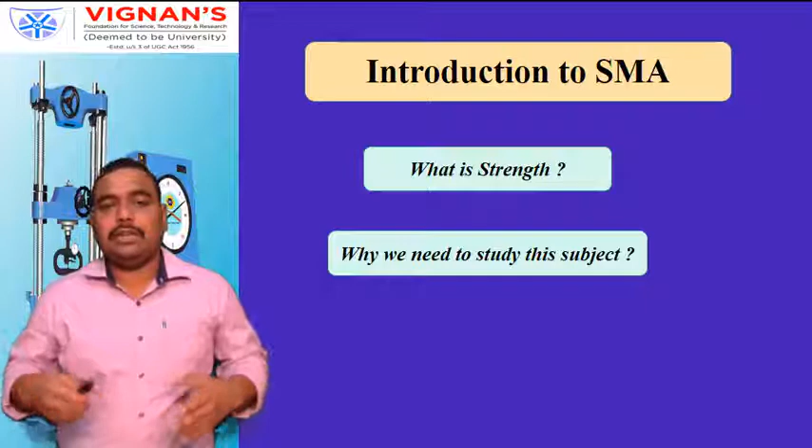Now, why do we need to study this subject? In engineering life, in application, daily we are using different materials. Before using the material, we must know the property of the material. Until we know the mechanical property of that material, we don't know what will be the behavior of the material. So before using that material, we must know its behavior and its property. That's why we should study this strength of materials subject. In this subject, we are also calculating the stresses developed on different components due to different types of loads, and we are analyzing it. This will be useful in the company for analyzing purposes, or also very useful for your project purpose or research work.

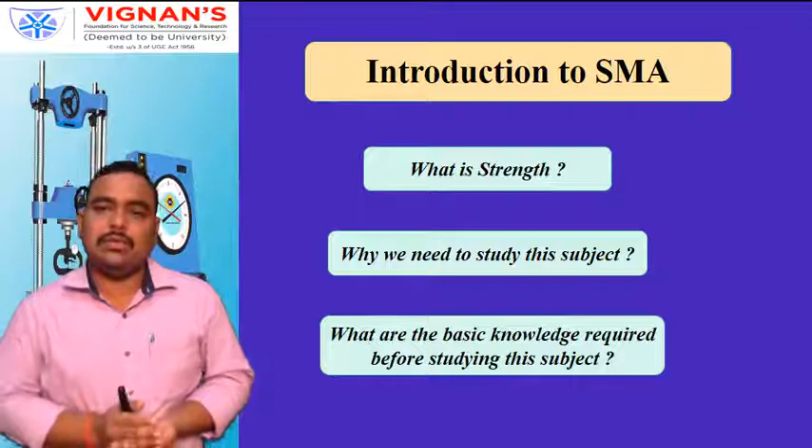Next is, what are the basic knowledge required before studying this subject? Here I am discussing about the stresses and analyzing, so definitely before that we have to study mechanics. In mechanics, we have already studied forces - parallel forces, non-parallel forces, concurrent forces, their resultant, and so on, frictions, centroid, center of gravity. So all this basic knowledge is needed before studying this subject.

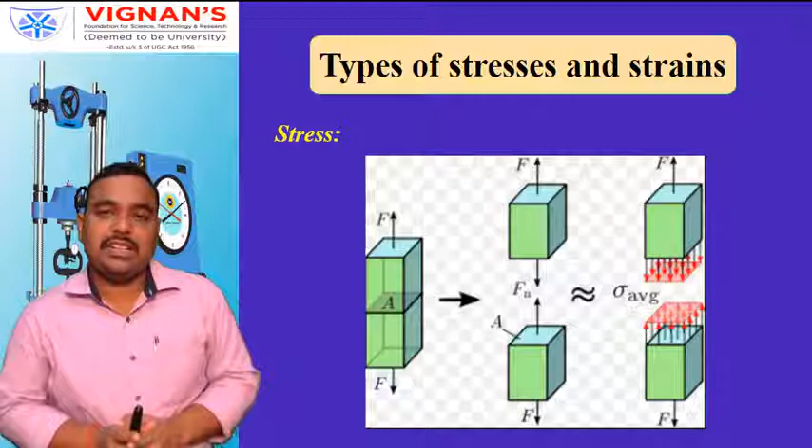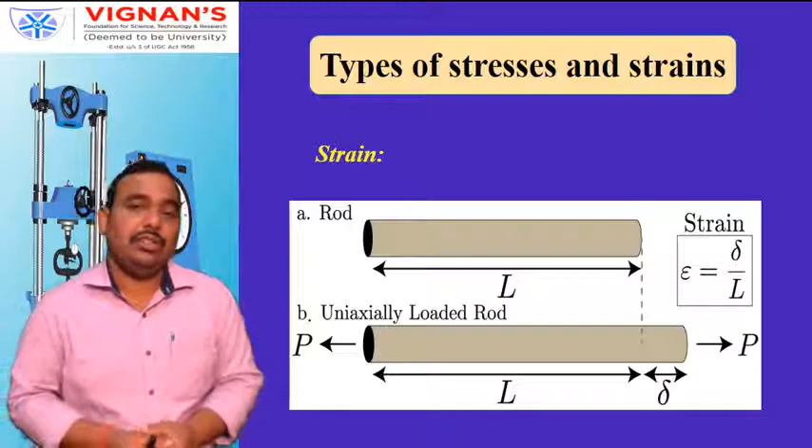Next is strain. What is strain? Strain is actually change in dimension by the original dimension - that's called strain. As shown here, one rod is there whose original length is L, and after applying the force P, it got elongated by delta. Now the new length is L plus delta. So strain is the change in dimension by the original dimension. Here the change in dimension is in the direction of length, so it is change in length by original length - the change in length is delta and original length is L. So delta by L gives the strain, denoted by epsilon. There is no unit of strain.

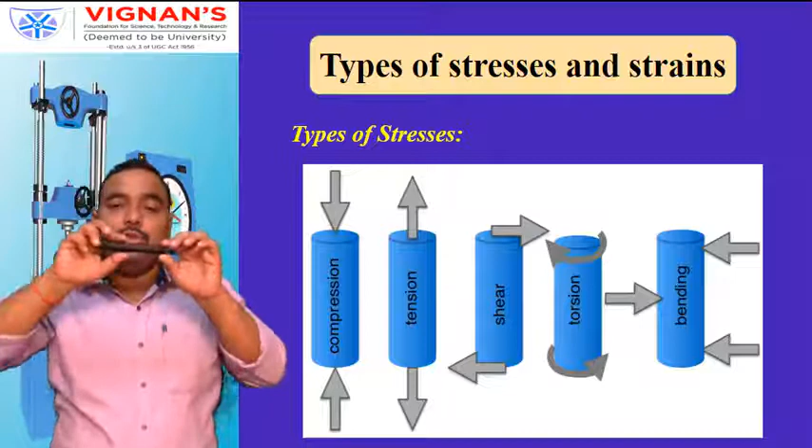And the last, fifth diagram, it is trying to bend. A rod is there. We are applying two vertical forces, and in the middle, opposite direction forces. Due to this force, the stress developed inside the element, inside the object, is called bending stress.

Next is types of strains. Here it is shown: one is normal strain, second is shear strain, and third is volumetric strain.

Normal strain is due to the load applied normally. If the load is applied normal to the surface, normal to the area, then the strain developed due to that load is called normal strain.

Shear strain is the strain developed due to the shearing force. Volumetric strain is nothing but the change in volume divided by the original volume, due to volumetric stress. So this is called volumetric strain.

Now normal strain is again divided into lateral strain and longitudinal strain. By the name itself you can identify: longitudinal means in the direction of the load applied. Longitudinal strain is the strain developed in the direction of load applied, and lateral means the perpendicular direction to the load applied.

If the load is applied in this direction, then the change in dimension perpendicular to this force is the lateral strain. Perpendicular means all directions, 360 degrees. So the change in dimension in this direction divided by its original dimension will give the lateral strain.

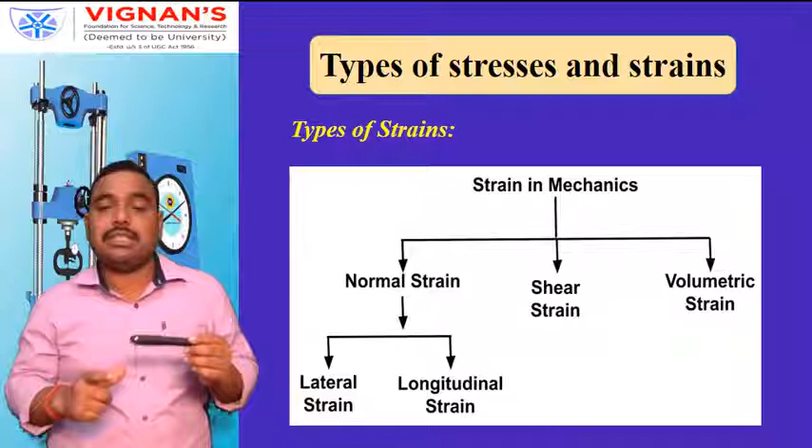So the longitudinal strain we can write as delta L divided by L, because delta L is the change in length in the direction of force applied. And the lateral strain we can write as delta D divided by capital D, because delta D is the change in dimension in the perpendicular direction of the force applied. So this is about normal strain, which is divided into longitudinal strain and lateral strain.

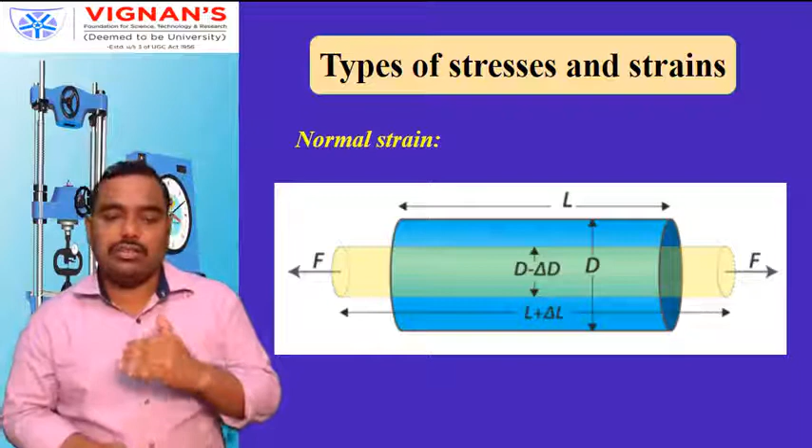Next is Hooke's law.

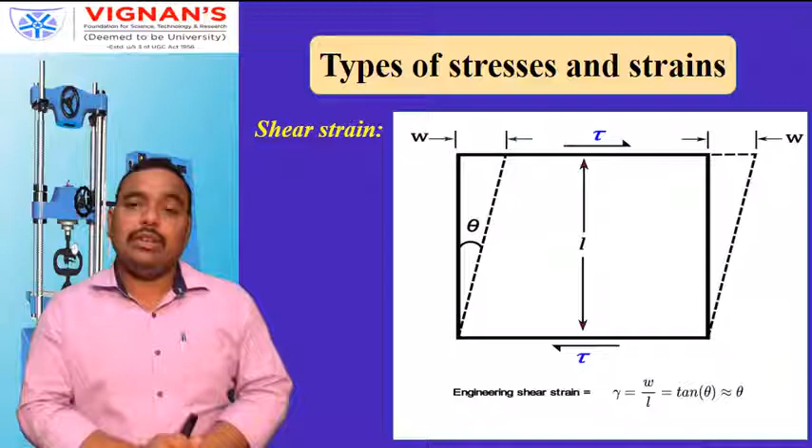Hooke's law states that stress is directly proportional to strain within the elastic limit. So we can write sigma directly proportional to epsilon, or E.

A small e here denotes the strain, sigma denotes the stress. So sigma is directly proportional to small e or epsilon. After removing the proportionality sign, we have to put one constant, so here it is kept, capital E.

Sigma is equal to capital E into small e, where capital E is called the modulus of elasticity, or Young's modulus of elasticity.

From this formula we can calculate capital E equal to sigma by small e, that is stress by strain. So we can define Young's modulus of elasticity as the ratio of stress to the strain.

It can be calculated that stress is P by A, and strain is delta L by L, which is change in length by original length.

So from here, capital E we can calculate as P into L by delta L into A. So this is the Young's modulus of elasticity, E.

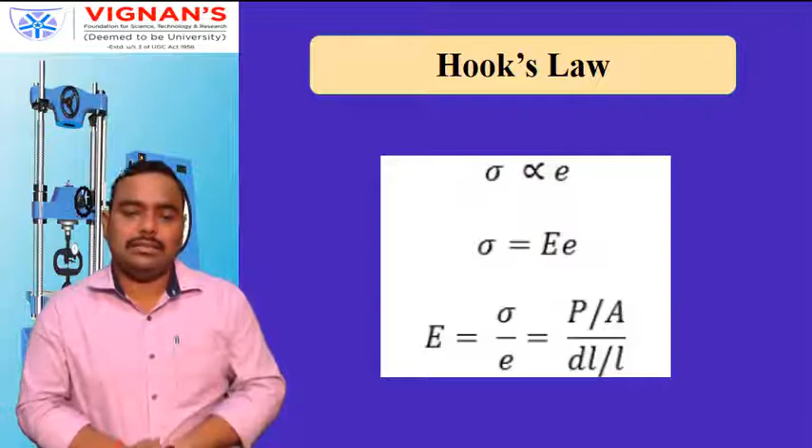Now we will solve one numerical based on this Hooke's law. A steel rod 1 meter long and 20 mm by 20 mm in cross section is shown.

It is subjected to a tensile force of 40 kilonewton. Determine the...

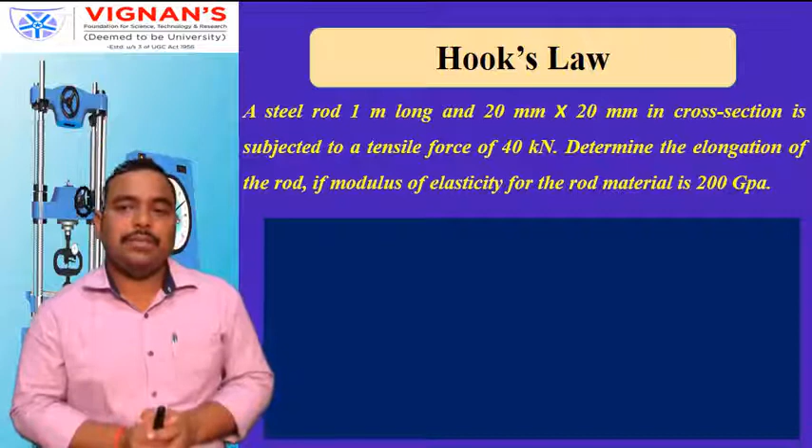...elongation of the rod. Elongation of the rod means delta L, change in length, if the modulus of elasticity for the rod material is 200 gigapascal.

So first of all we will write the given data. The given length is 1 meter, which we can write as 1 into 10 to the power 3 mm.

Next, the cross sectional area is given as 20 into 20, that is 400 mm square, and the tensile force P acting is 40 kilonewton, which we convert into Newton, that is 40 into 10 to the power 3 Newton.

Next is the modulus of elasticity, capital E, given as 200 gigapascal, and 1 gigapascal means 10 to the power 9 Pascal.

1 gigapascal means 10 to the power 9 Pascal, and 1 Pascal means 1 Newton per meter square. So we convert that meter into mm, and we get 10 to the power minus 6 Newton per mm square.

It means 1 Pascal equals 10 to the power minus 6 Newton per mm square. So if you convert 200 gigapascal to Newton per mm square, we get 200 into 10 to the power 3 Newton per mm square. So this is the given data.

Now it is asking for elongation, which means change in length. I told you capital E equals P into L by delta L into A. From that formula we can get delta L equal to P into L by A into E.

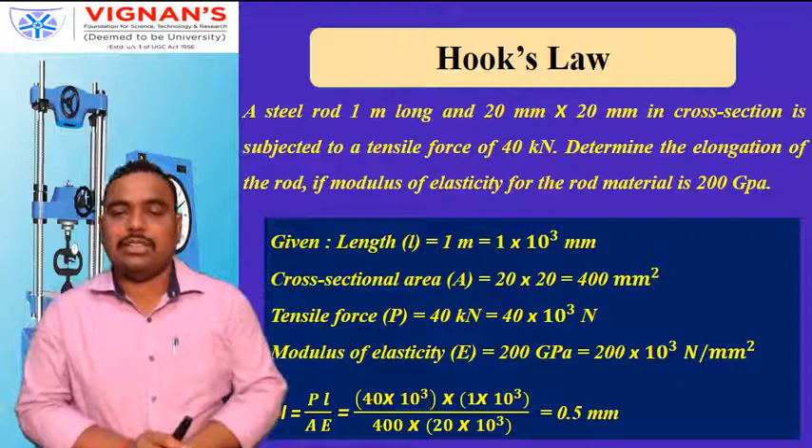Next we will solve one more numerical. A hollow cylinder 2 meter long has an outside diameter of 50 mm.

The hollow cylinder's length is 2 meter, that is 2000 mm. It has an outside diameter of 50 mm and inside diameter of 30 mm. If the cylinder is carrying a load of 25 kilonewton, that means 25 into 10 to the power 3 Newton, find the stress in the cylinder.

Stress sigma. Also find the deformation of the cylinder, means change in length, if the value of modulus of elasticity for the cylinder material is 100 gigapascal. So first of all we write the given data.

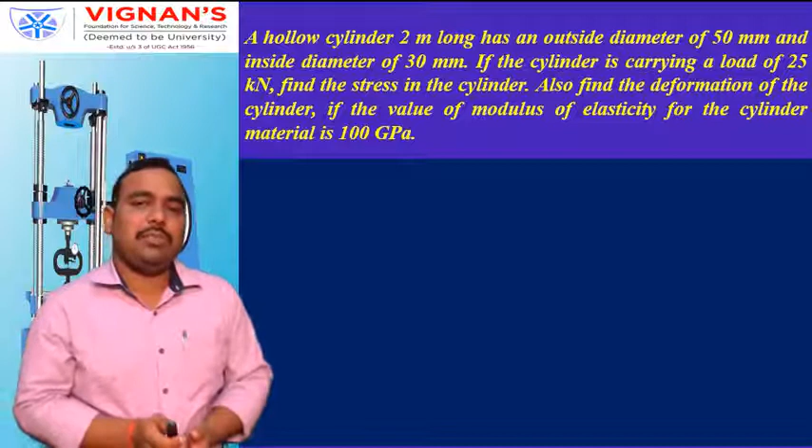The given length is 2 meter, that is 2 into 10 to the power 3 mm. Outside diameter, capital D, is equal to 50 mm. Inside diameter of the cylinder is 30 mm.

The load applied P is 25 kilonewton, means 25 into 10 to the power 3 Newton, and modulus of elasticity capital E is given as 100 gigapascal, means 100 into 10 to the power 3 Newton per mm square.

So first of all we calculate the area, and area can be calculated by pi by 4 into capital D square minus small d square.

Capital D value is 50 mm, small d value is 30 mm. Substitute this value and we got 1257 mm square. That is the cross sectional area of the cylinder.

Stress formula: force applied divided by the cross sectional area. Force is given as 25 into 10 to the power 3 Newton. Area we have calculated is 1257. Substitute this value and we'll get the sigma value. Stress value is 19.9 Newton per mm square, that is 19.9 megapascal. It is also asking the change in dimension or deformation in the cylinder.

Deformation formula: delta L equal to PL by A into E. We substitute all this value. P value is 25 into 10 to the power 3 Newton. L value is 2 into 10 to the power 3 mm. Area is 1257 mm square, and E value is 100 into 10 to the power 3 megapascal or Newton per mm square. After solving these values, we got 0.4 mm. That is the answer. This numerical completed.

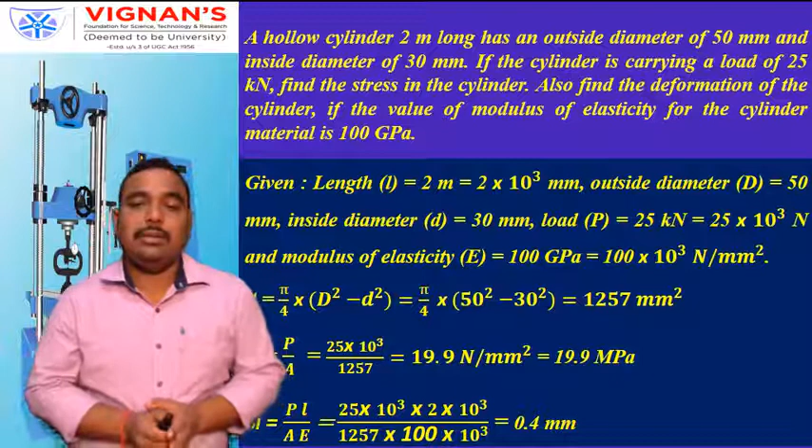Next, one more numerical is there.

A square bar of 20 mm side is held between two rigid plates. In the diagram, one square bar is there with two ends A and C rigidly fixed, and loaded by an axial force P equal to 450 kilonewton. An axial force P as shown there is acting in the downward direction, that is 450 kilonewton. Find the reactions at the ends A and C.

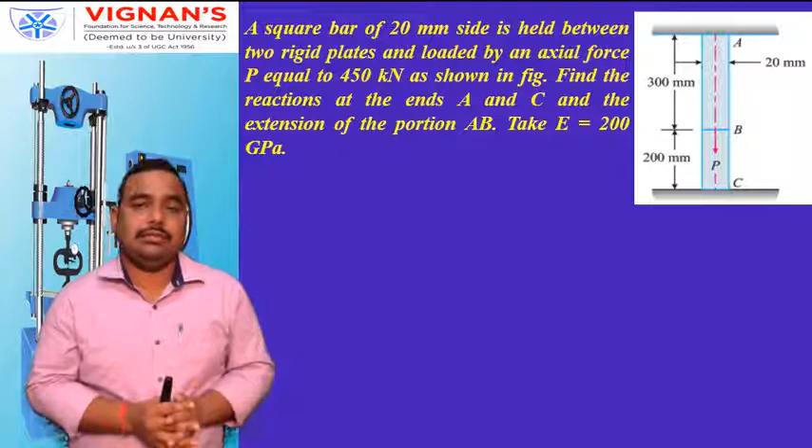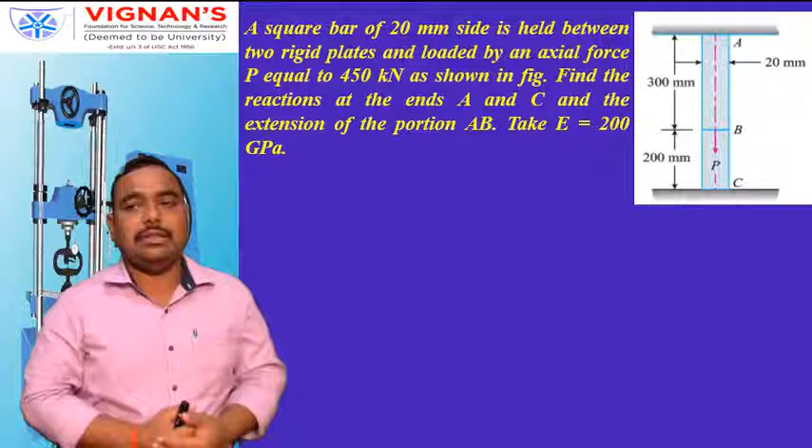It is asking to find the reactions. Due to this load, reactions will be there at point A and point C. What is the reaction at point A and C? It is also asking the extension of the portion AB. See, in the diagram, due to that load P, AB will increase whereas BC will decrease. So it is asking whatever change in length in AB, that will be equal to BC. So it is asking the extension in the portion AB, and given E equal to 200 gigapascal.

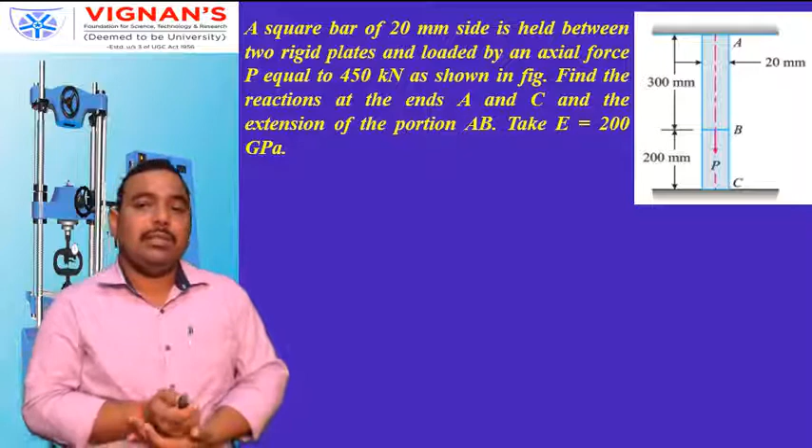First of all we will write the given data. Before that we will analyze these forces, as given in this diagram. At point B, load is acting in the downward direction, that is 450 kilonewton. Point B is the part of portion AB as well as the portion BC.

So let us say, due to the load acting at point B, the load in the portion AB is RA, or reaction force at point A is RA. Due to the reaction force RA shown here in the upward direction, downward direction also it will be RA, from Newton's third law. Similarly, we are taking RC, the reaction force at point C, in the upward direction, and at point B, RC is in the downward direction.

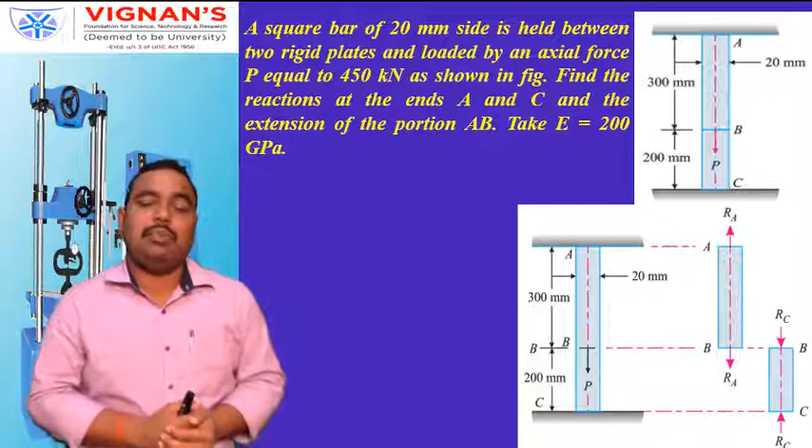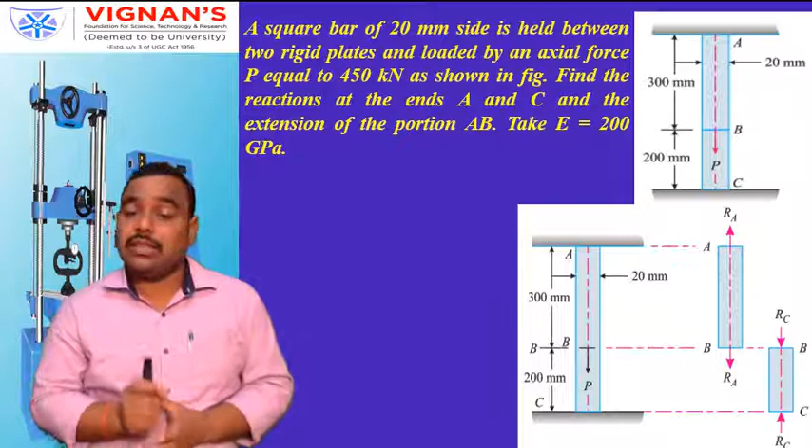If you see this second diagram, at point B, RA and RC are not acting in opposite direction, both are acting in the same direction at point B, and the total load acting at point B is 450 kilonewton. So therefore we can say RA plus RC, at point B only we are talking, must be equal to the external load applied, that is 450 kilonewton. So RA plus RC is equal to 450 kilonewton.

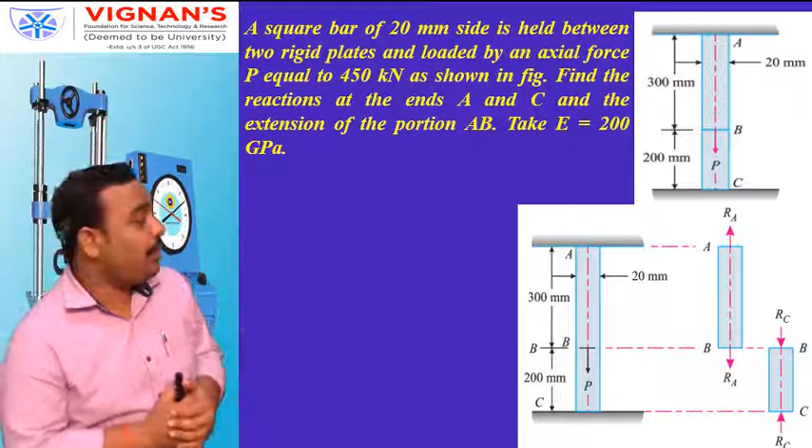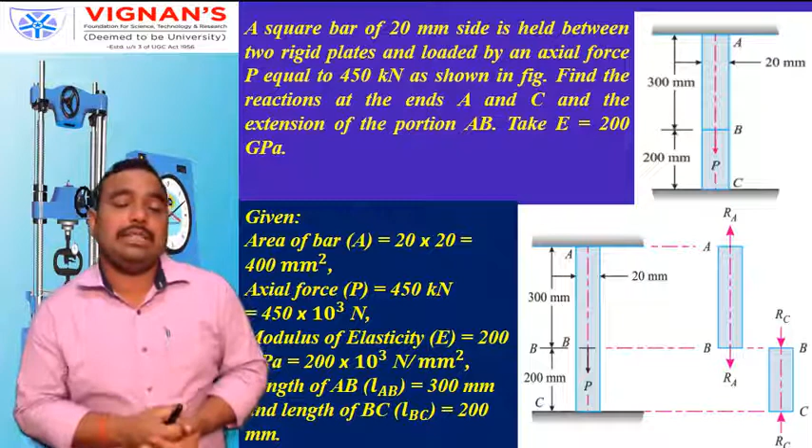Now we'll write the given data. Area of the bar is given as 20 into 20, that is 400 mm square. Axial force P is acting 450 kilonewton, that is 450 into 10 power 3 Newton. Modulus of elasticity capital E equal to 200 gigapascal, that is 200 into 10 power 3 Newton per mm square. Length of the portion AB is given, LAB, that is 300 mm, and the length of portion BC is given, that is 200 mm, denoted as LBC.

So now, first of all, RA is the reaction at point A and RC is the reaction at point C. At point B, RA and RC both are acting in the same direction, and total load acting at point B is 450 kilonewton. So RA plus RC should be equal to 450. This is equation number 1.

Now increase in the portion AB, we can calculate as delta LAB equal to RA into length of AB divided by area into E. RA we don't know, we need to calculate RA value. LAB is given 300, area is given 20 into 20, that is 400 mm square. E value is given, for time being we are writing just as AE. This is equation number 2.

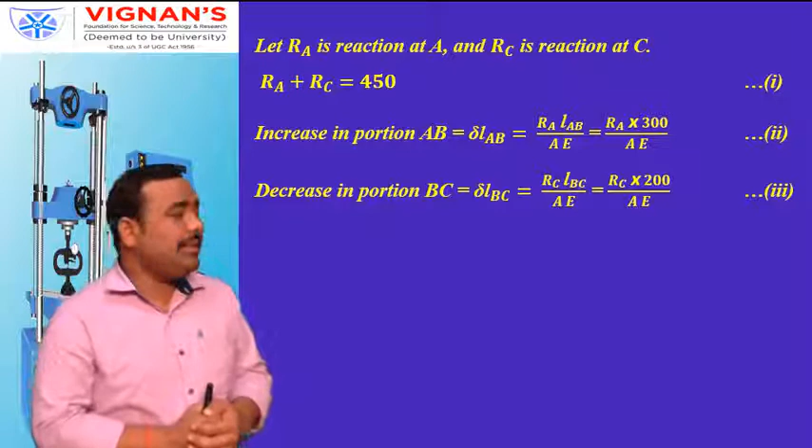Also decrease in the portion BC, equal to delta LBC, that is RC into LBC, length of BC divided by area into E. Length of BC is given 200 mm. We substitute this value and this is equation number 3.

Now point B is the part of portion AB as well as the part of portion BC. So the question is asking by how much point B is moving, or how much deformation is there for AB. Whatever change in length is there for AB, same change in length is there for BC. The difference is that AB is elongating and BC is decreasing. So how much AB will elongate, by the same dimension BC will contract or decrease.

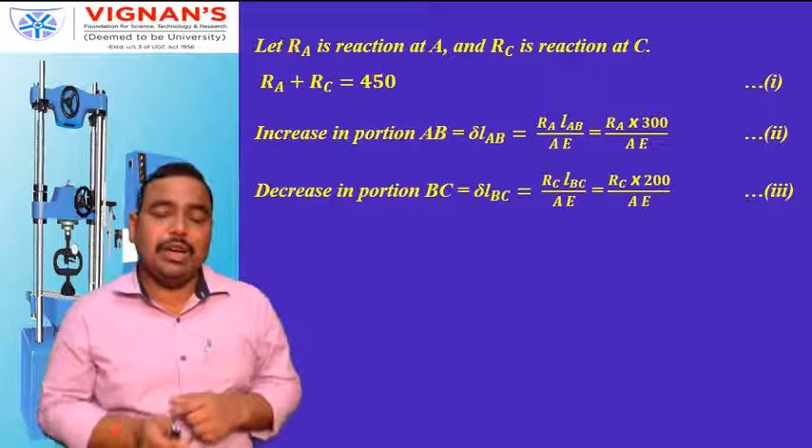From equation 2nd and equation 3rd, we can write delta LAB equal to delta LBC. Substituting this value, we got RC equal to 1.5 of RA.

Now from equation 1st, we know that RA plus RC equal to 450. Substitute RC equal to 1.5 RA, and we get RA plus 1.5 RA equal to 450. From there we get RA equal to 180 kilonewton and RC equal to 270 kilonewton. That is the reactions at support A and C.

Now the deformation in AB, or deflection in AB, we can say delta LAB equal to RA into 300 by A into E, as written in equation number 2. Substitute RA 180 into 10 to the power 3 Newton into 300, divided by area 20 into 20, that is 400 mm square. E value is given 200 into 10 to the power 3, giving delta LAB equal to 0.675 mm. That is the complete solution of this numerical.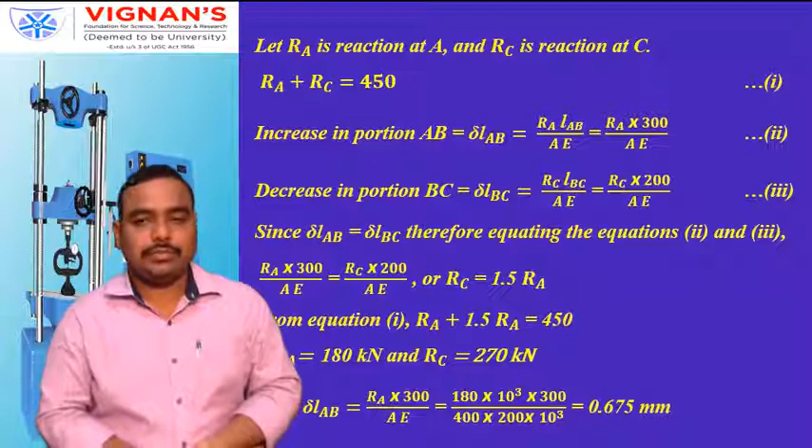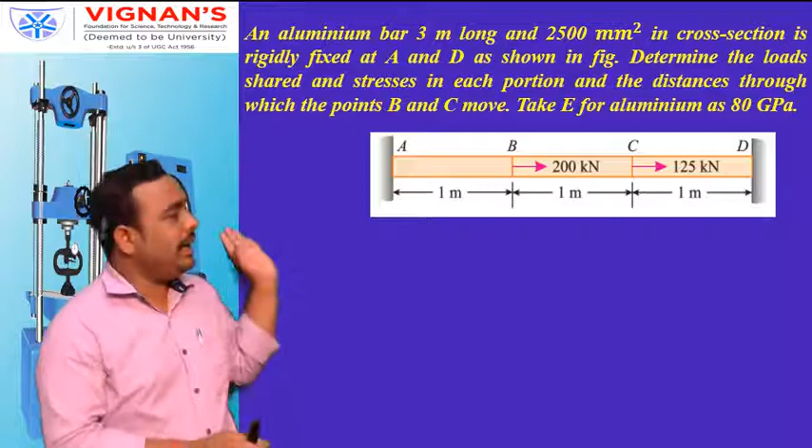One more numerical is there. An aluminium bar 3 meter long and 2500 mm square in cross section is rigidly fixed at point A and D as shown in the figure. Determine the loads shared and stresses in each portion, and the distances through which points B and C move. Take E for aluminium as 80 gigapascal.

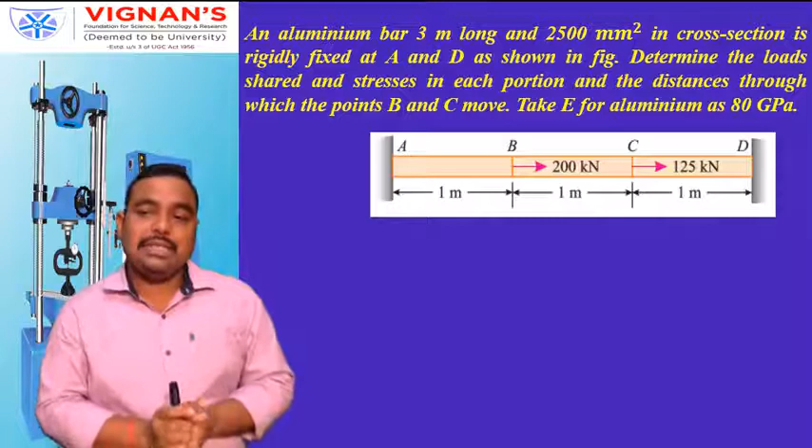So this is the diagram shown. Point A and point D are fixed. At point B, a load is acting of 200 kilonewton. At point C, load is acting of 125 kilonewton. AB is equal to BC is equal to CD equal to 1 meter.

Here, first of all, we will write the given data: total length of bar L equal to 3 meter, area of cross section A equal to 2500 mm square, modulus of elasticity E equal to 80 gigapascal, that is 80 into 10 to the power 3 Newton per mm square, and length of portion AB equal to LBC equal to LCD equal to 1 meter, that is 1 into 10 to the power 3 mm.

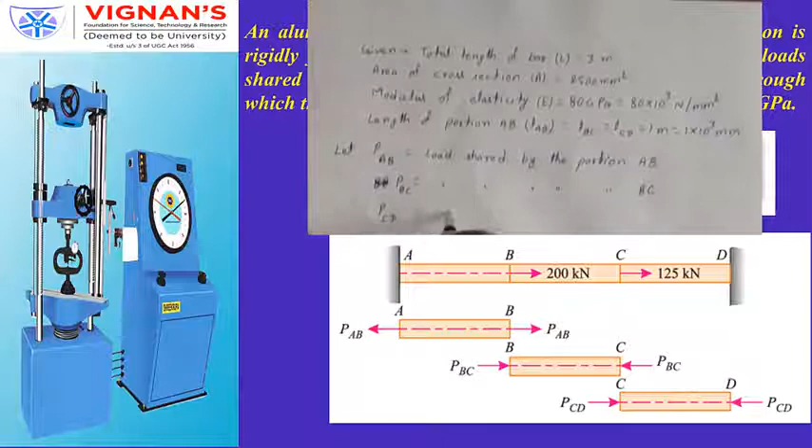Now let us consider PAB is the load shared by the portion AB, PBC is the load shared by the portion BC, and similarly PCD is the load shared by the portion CD.

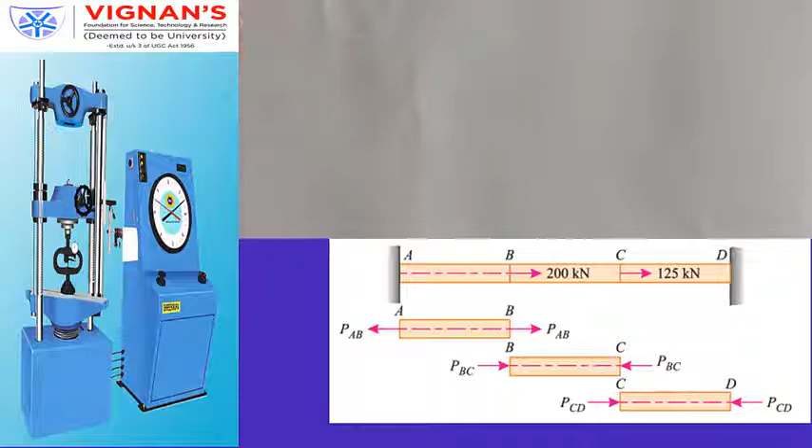Since the bar is rigidly fixed at point A and D, therefore the portion AB will be subjected to tension, while the portion BC and CD will be subjected to compression as shown in the second figure. Moreover, increase in the portion AB will be equal to the sum of the decrease in portion BC and CD.

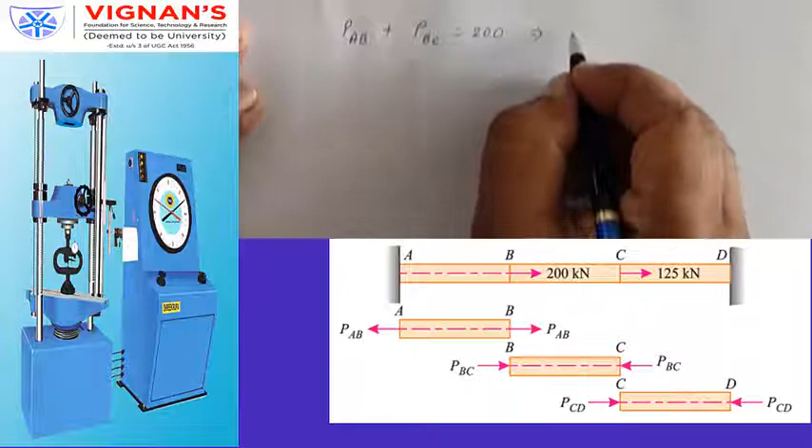Now from the geometry of the bar, we find that PAB plus PBC is equal to 200. From here we can write PAB equal to 200 minus PBC. This is equation number 1.

And again we can write PCD minus PBC equal to 125. From here we can write PCD is equal to 125 plus PBC. This is equation number 2.

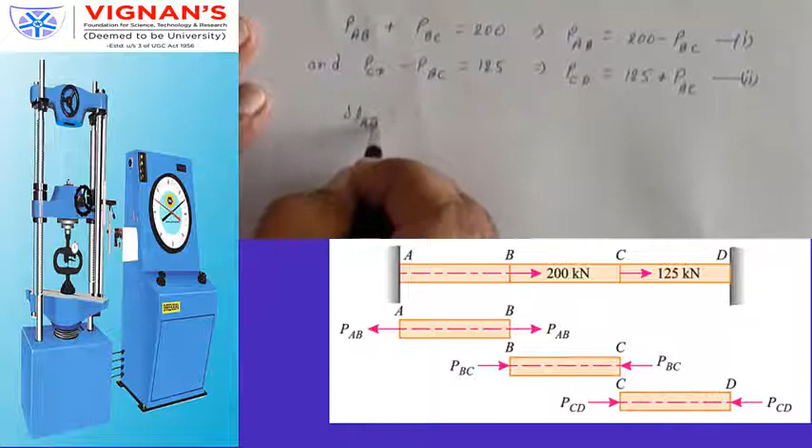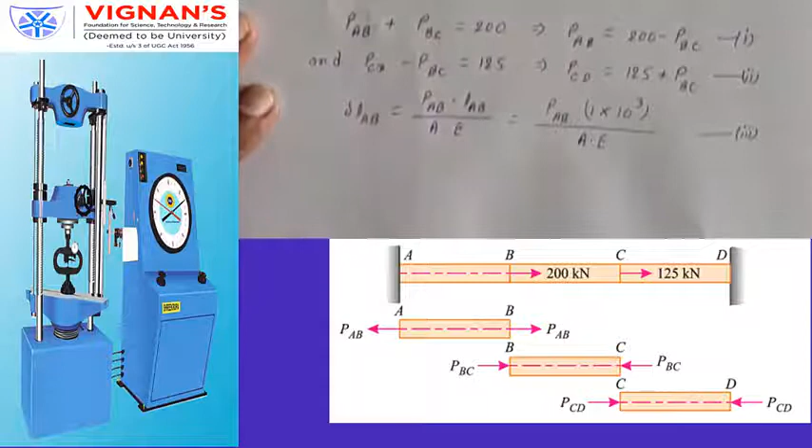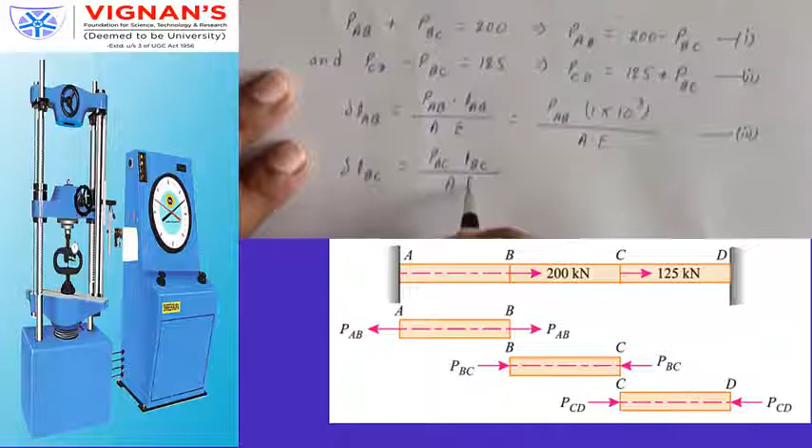Now similarly we can write for BC and CD. Delta LBC is PBC into LBC divided by A into E, that is equal to PBC into 1 into 10 to the power 3 divided by A into E, equation number 4. And delta LCD is equal to PCD into LCD divided by A into E, equal to PCD into 1 into 10 to the power 3, because length is equal for all, divided by A into E. This is equation number 5.

So if you substitute all this, I told that change in length in AB will be equal to change in length in BC plus change in length in CD. So delta LAB is equal to delta LBC plus delta LCD. After substituting these values from equations 3, 4 and 5, we got PAB equal to PBC plus PCD.

Now substituting the value of PAB and PCD from equations 1 and 2 in this equation, we get 200 minus PBC equal to PBC plus 125 plus PBC. So from here we can solve 3 PBC is equal to 200 minus 125, equal to 75 kilonewton. From here we can calculate PBC equal to 25 kilonewton. This is the PBC.

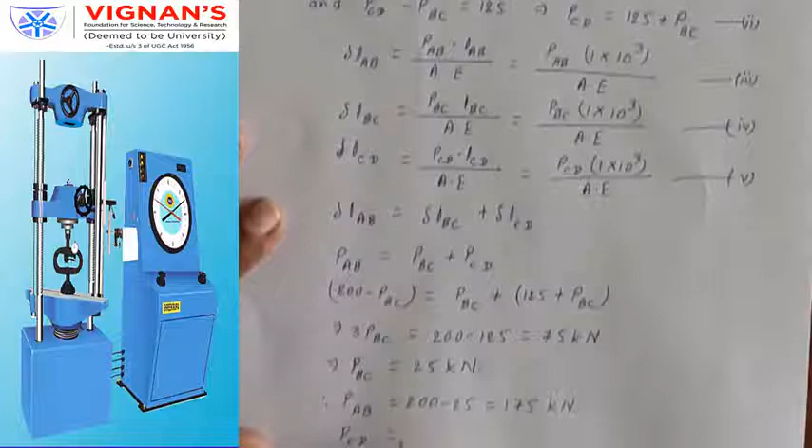Now substitute this value of PBC in equations 1 and 2, and we will get PAB is equal to 200 minus 25 equal to 175 kilonewton. And after substituting in equation 2 we will get PCD is equal to 125 plus PBC, that is 25, equal to 150 kilonewton. So these three are the answer, that is asking the load in each portion, load shared by each portion.

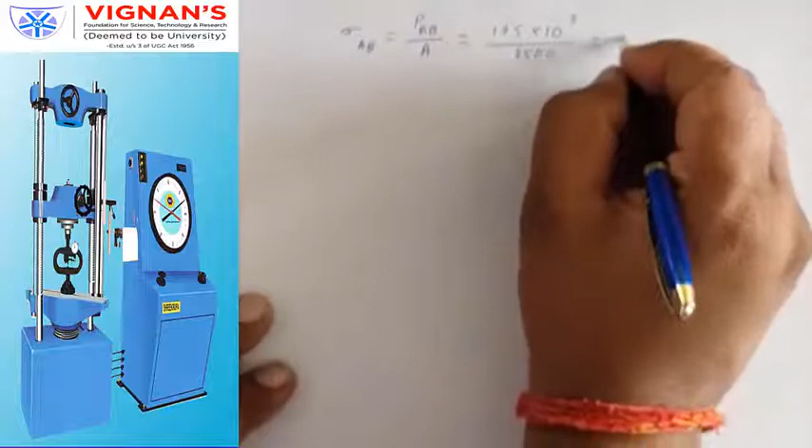Now stresses in each portion it is asking. So stress, we know that stress equal to force by area. So a stress can be calculated as sigma AB, stress in portion AB, that is equal to PAB divided by area. PAB is 175, we have calculated, into 10 to power 3 divided by 2500, that is equal to 70 Newton per mm square. You can write it, that is in tension, it is tensile force acting.

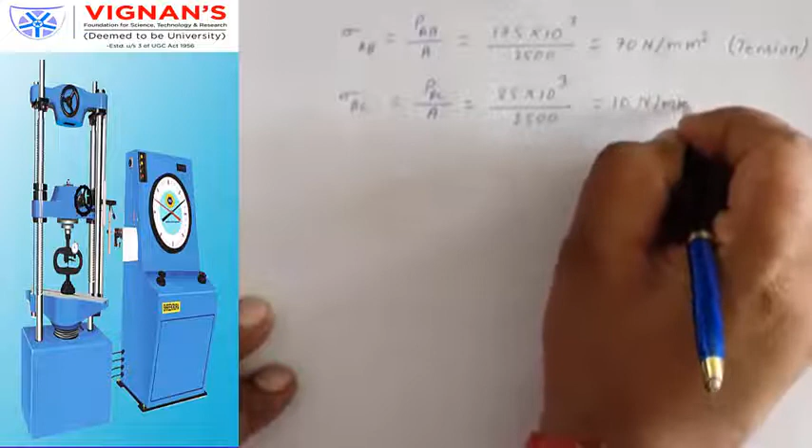Now sigma BC is equal to PBC divided by A, that is equal to 25 into 10 to the power 3 divided by 2500, equal to 10 Newton per mm square, that it was acting in compression.

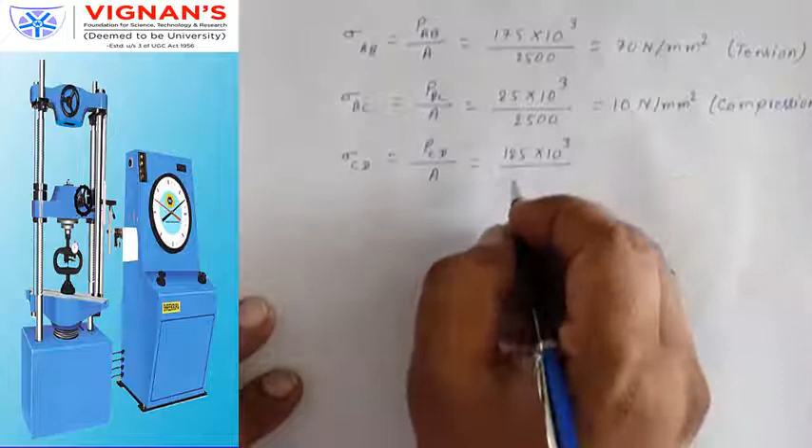Similarly, we can calculate sigma CD, stress in CD is equal to PCD divided by area A, is equal to PCD which is 125 into 10 to the power 3 divided by 150... 150 into 10 to power 3 divided by 2500 is equal to 60 Newton per mm square. This is also in compression.

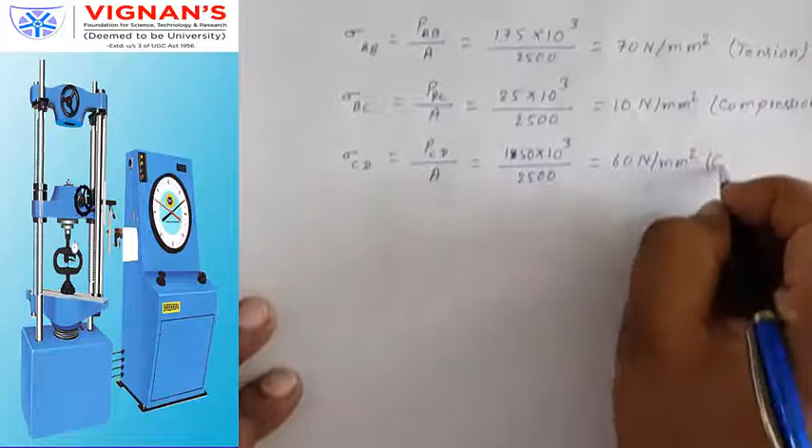So it was asking the stresses developed in each portion. So this is the answer for that question.

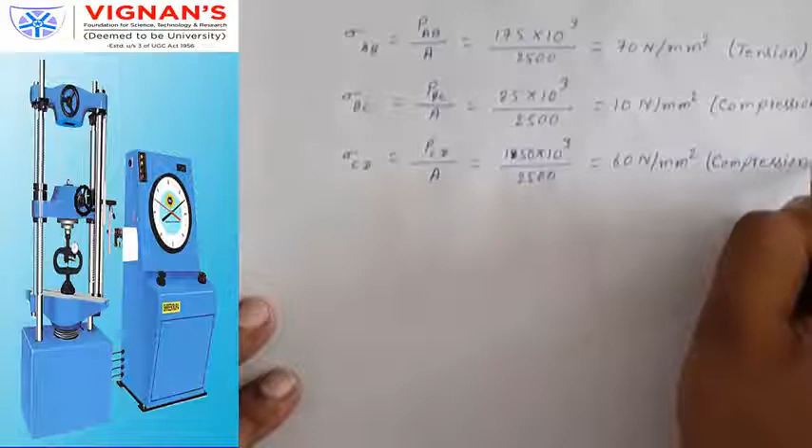Now it is asking the change in position of point B and point C. So for that purpose we can calculate the change in length in AB and change in length in CD. Then we can easily get the change in position of point B as well as point C. So for that purpose we know that delta LAB, change in length, is P into L by A into E.

So PAB into LAB divided by A into E. P value in AB is 175. LAB, so 175 into 10 to power 3, LAB length 1 into 10 to power 3 divided by 2500 is the area, and 80 into 10 to power 3 is the Young's modulus of elasticity, and that value is 0.875 mm. It means point B will move by 0.875 mm towards C because it is in tension.

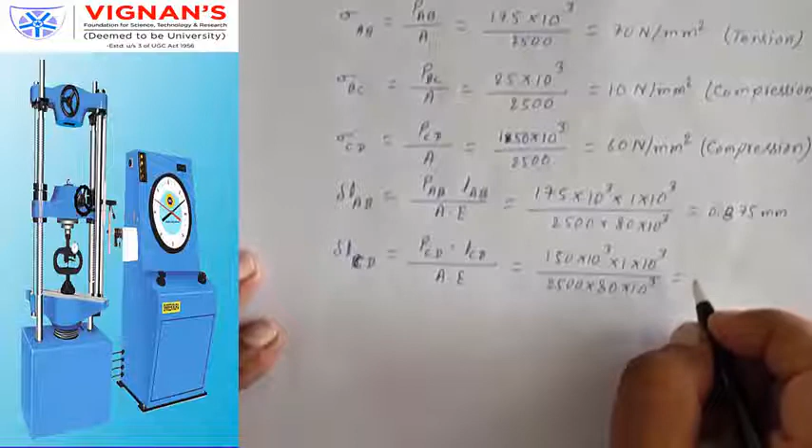Similarly, delta L CD will be equal to PCD into LCD divided by A into E. So PCD is 150 into 10 to the power 3 into 1 into 10 to the power 3 divided by 2500 into 80 into 10 to the power 3. So from here we got 0.75 mm towards point D. So this delta CD is telling the deflection of point C towards point D by 0.75 mm.

That is the complete solution of this numerical. That's all for today class. We will continue this in next lecture. So all of you practice well. Thank you very much.